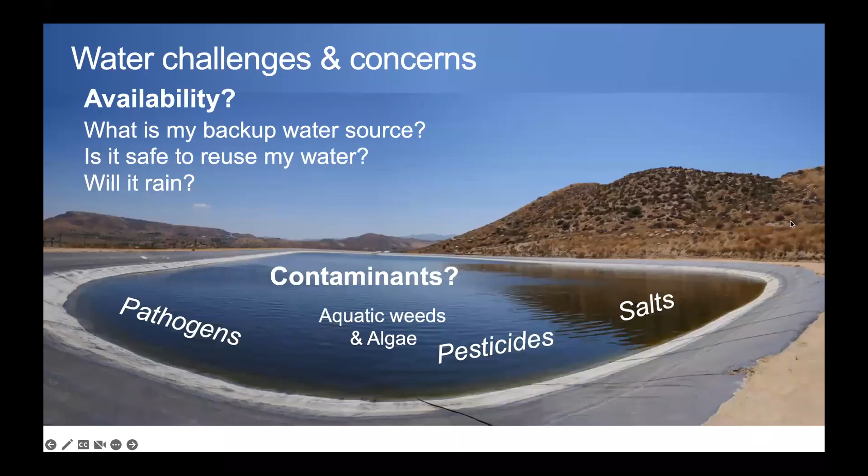And then if we think about the recycling side of things, contaminants are one of those first items that come to mind, and we're just asking, what's present? Do I have plant pathogens that I need to be worried about? Or if it's a landscape application of water, are there human pathogens that I need to worry about that could potentially impact health of humans, kids, or domestic animals? Algae and aquatic weeds are a big contaminant in recycled water, but also in surface water receiving runoff from the landscape or production areas. Pesticides and salts are also contaminants of concern, and so we'll talk about those individually as we go along today.

So the production challenges. If I think about this from a producer side and then from an irrigation side, because I'm also the nursery extension specialist for South Carolina, I tend to think more on the production side of things than the landscape side of things. But many of the production practices that impact how contaminants move on site or how plants grow, irrigation timing, irrigation efficiency, those kind of things, cut across whether you're talking about on-farm use or landscape uses, and the cultural practices of pesticide use or fertilizer application timing and plant diseases.

So in reality, it's not just, am I applying water efficiently or am I applying fertilizer efficiently, but it's, did I do it at the right time? Or what have my practices that I didn't want to change, because it's easier to do it one way than to change something, what have I lost? Is it money in terms of shrinkage of my crop? Or is it opportunity cost, that I couldn't sell them for a premium, or that I didn't grow as many? There's just a lot of factors that sort of connect with each other that really influence it.

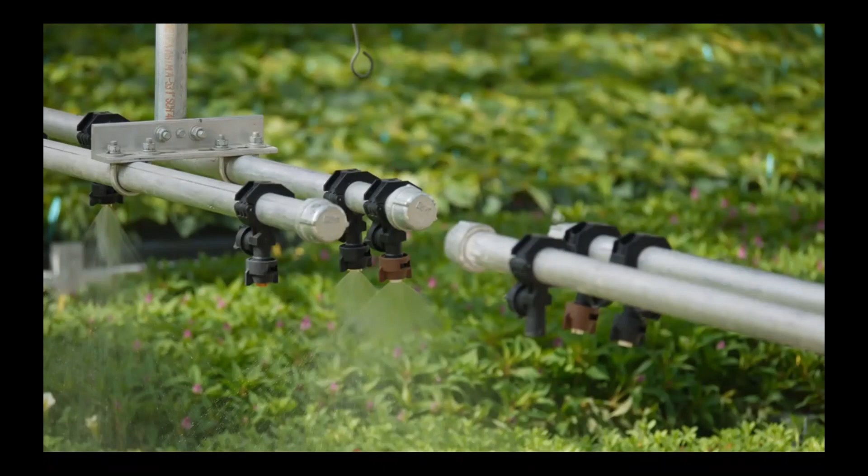And so when we think about growers, they apply water in different ways, some of which are more efficient than others. In this image, this is a boom spray system that's in a greenhouse. So the water that's applied within the greenhouse is typically captured back into a cistern and recycled. But when you get to on-farm water, typically smaller containers are irrigated overhead, and those may or may not be efficient, and then the water runs off that production area.

So operational water can be irrigation water, but it's also water that has hit its surface and come into contact with the contaminant, whether that's a sediment contaminant or pesticides or pathogens or anything else that might be undesirable. Now, when Sheetal and I were talking about stormwater and how to classify what we could capture and not capture, some of this gets down to classifications, the non-contaminated stormwater.

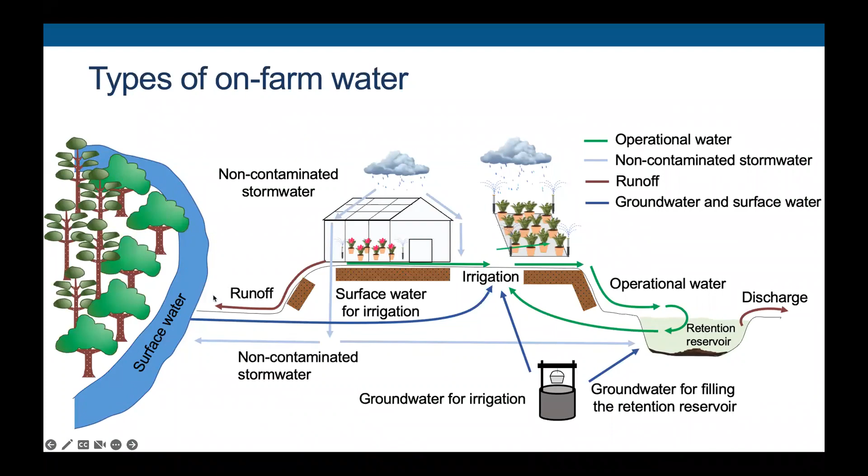I'm going to use some of these terms, but really operational water and then irrigation return flow, which is this green line where once irrigation is applied, whether it's to a landscape or to a production area, that water, if it can go into a retention reservoir, that's where we have the highest opportunity to recycle water, but also potentially recycle some of the nutrients within that water to better support plant growth, while also minimizing potential impacts to surface waters, because eutrophication and algal blooms are not something we want.

And we're seeing those more and more often as water becomes more limited and we're not recycling water as much in some of our lakes and our reservoirs. We're seeing that nutrients are accumulating. And what happens when you have nutrients accumulate in some of these areas is the process of eutrophication, which is just frankly nutrient enrichment, where you have more nutrients added than the system is used to.

And what typically happens then is you have algal blooms or excessive growth of aquatic plants and algae that can then, when they die, oxygen is consumed from the water column as they're broken down, and you can have fish kills, or you can have the worst case scenario, harmful algal blooms.

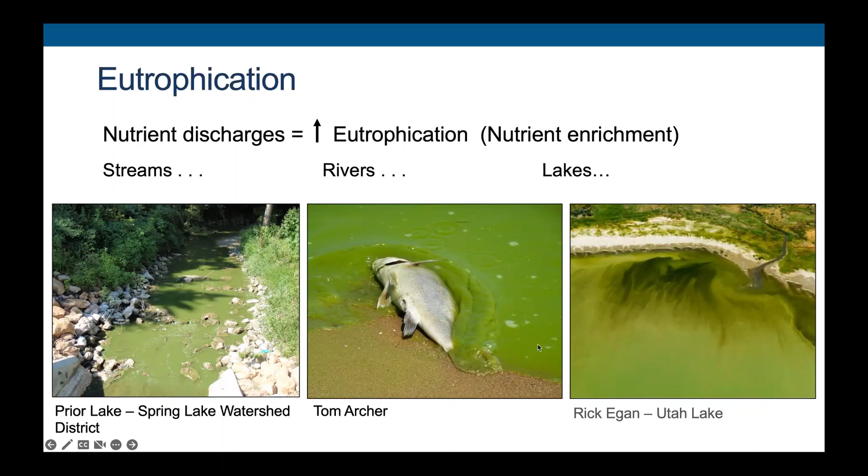And so this is where runoff control and capture of stormwater and detention of that stormwater before it leaves a particular area so that sediments or other things have the opportunity to settle out, that is what is ideal. And then also, it's not only just are you managing the runoff, but then you have water available for recycling when and if it's possible.

And that's where some of the intricacies of what you're allowed to do, I'm not sure of. So I'm just going to tell you, if you are allowed to do it and you can do it and you can get the right permits and things like that, this is how I would sort of go about it. But so if we think about availability of water for recycling, one of the first things I think about is how often is my reservoir going to get refilled by means other than just landscape runoff.

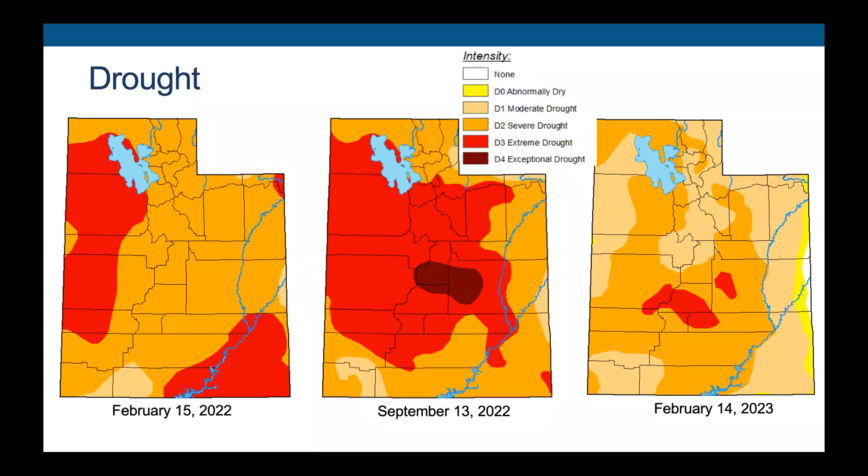So looking at y'all's drought map over the last year or so, you've had some pretty significant changes from extreme drought to exceptional drought, then back to moderate drought, and maybe even some just abnormally dry. And so this gets to how can you actually think about managing these reservoirs or your landscapes, frankly, when you don't know what the weather's going to be and you don't know when it's going to rain. Now, frankly, I think y'all might have had a bit of relief with the snowstorms and the rain that hit the rest of the West Coast. But in so saying, that's just a temporal thing.

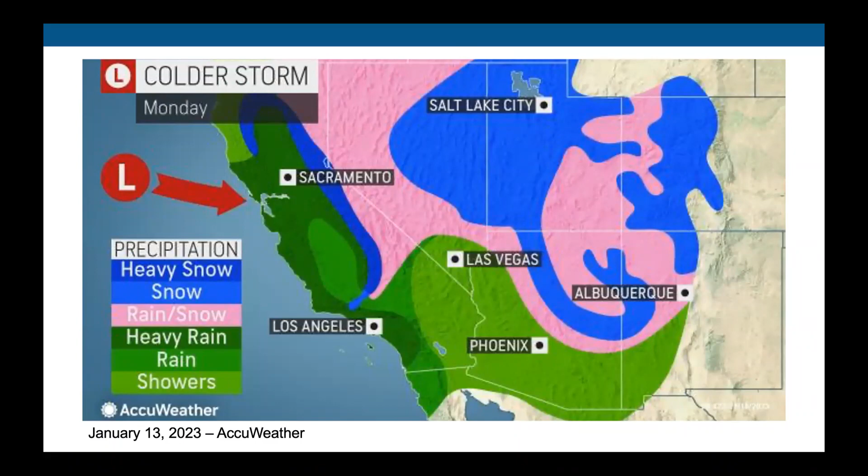So how do you capitalize on the opportunities when you have them? And so that's when thinking about the infrastructure becomes really critical, because if you have the infrastructure in place to capture water, it is much easier to then capitalize on those instances when you do have rain, so that you can ensure that you're capturing as much as you're allowed to. But when you do capture that, and especially if it's running off a land surface or a production area, there's going to be sediment carried in that water.

So if you have sediment added to water and you had a pesticide that was applied, chances are the pesticide associates with that sediment. And then it has the opportunity to move and be carried, and so it could move off farm, which would not be ideal. Ideally, these retention reservoirs are designed to capture and detain those contaminants. And then you have some sort of retention time; the longer the water stays in there without being cycled or applied somewhere else, the better the opportunity for the contaminant to degrade.

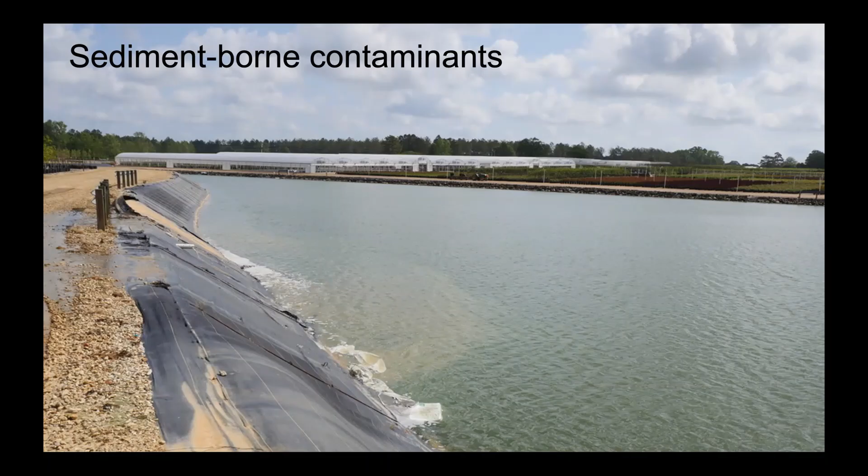But you can also have pesticides flowing in the water, and there are also contaminants of emerging concern. If we think about landscape applications, or if you all have access to municipal reclaimed water, there are some contaminants of emerging concern we can talk about if you're interested, but think about pharmaceuticals and personal care products, industrial or household chemicals, nanomaterials, and other things like that. There's just a lot of potential contaminants that we are not as sure about how to manage, and we don't know the potential impacts they have on the landscape.

So retention reservoirs, again, just give you one more opportunity to detain those and stop them from moving further within the landscape. And then the harmful algal blooms. This is one of the ones that I think we're going to continue to see growing in your awareness, but also in, what's the word I'm looking for?

How often they occur: they're going to occur more frequently, so they're going to be brought to our notice more often. Frankly, we just had one, and it's very unusual, in February at our botanical garden, where we found a harmful algal bloom. This is just something where nutrients aren't limiting, algal species start to grow, and then you have a cyanobacteria that actually starts to grow, and a toxin can be released. It's not always released, but it can be.

So we want to prevent algal blooms so that we don't have the potential for the toxin to be released, because it can impact humans, domestic animals, livestock, and wildlife who depend on those water stores for their survival. So it becomes pretty critical to pay attention and work to not have those issues, or to manage these as well. So after all the doom and gloom of the contaminants, one of the good things about reservoirs is that it sort of helps provide water security.

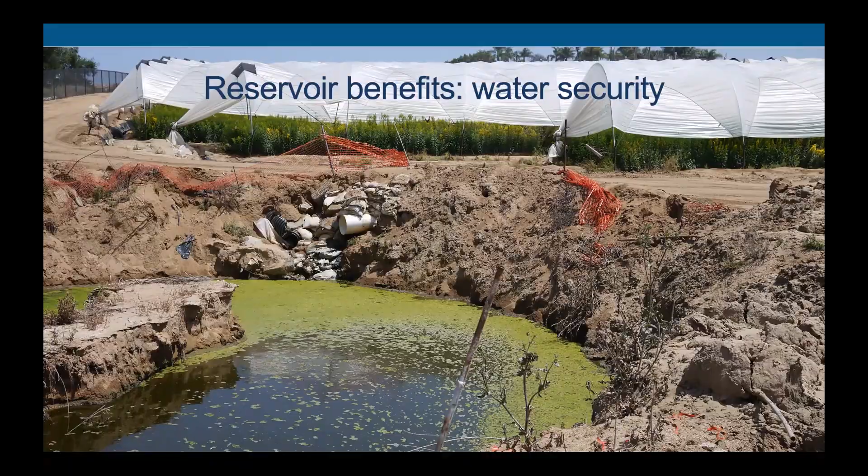This is actually a sediment forebay before a reservoir, and they cleaned out some of it, but you can see the massive sediment in the center of this forebay that they've already removed, and they still have to come back and remove more. Forebays help us trap sediment, and that's where you can lose capacity for storage, but then you can clean it out. So if we have water security because you're storing water, we're also trapping contaminants. If we can trap the contaminants or the sediment before it gets into a reservoir, we're better off, because then you have a smaller surface area that you actually have to manage.

Because management is one of those critical pieces. If you don't plan for management or maintaining the pool depth within your reservoir, and you allow sediment to just accumulate, you're going to lose some of your capacity for storage. And then all of your best laid plans may not allow you to capture what you need for storm mitigation purposes or for water security purposes.

And then again, contaminant trapping: we can trap agrochemicals, fertilizers, and pesticides, so we can retain those nutrients. Ideally, you want to recycle that water and reuse those nutrients so that you're not applying as much fertilizer. But within the landscape, think about this as a stormwater detention basin or a stormwater pond, where you're using that pond as a sink to help manage those contaminants before they get into surface waters or larger, more recreationally focused lakes where humans could be impacted.

And then again, plant pathogens. For some of the plant pathogens of most concern to growers, like Phytophthora and Pythium, the propagules that travel in water have a finite lifespan, usually less than 48 hours. So if you can have a retention time longer than that before water is reused, chances are most of those propagules will be dead and no longer able to infect plants. So even before any treatment, that water is less likely to carry a propagule that can infest or infect the plant.

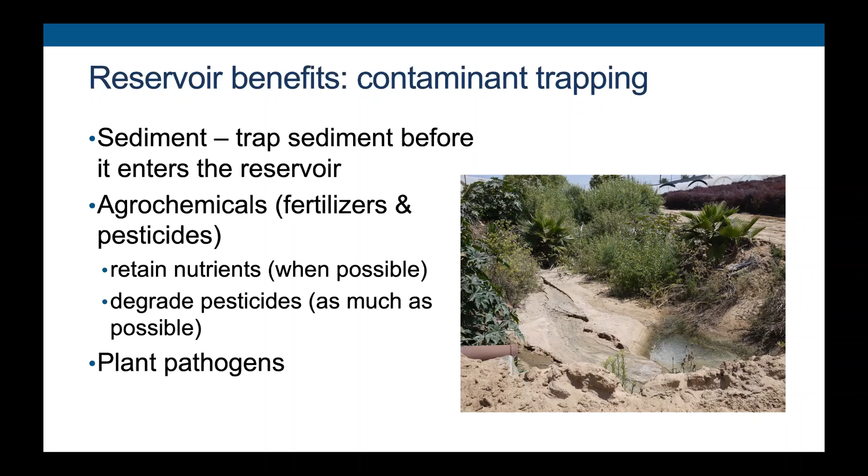So when we think about reservoir design, there are three things we really want to think about. On this slide you'll see the cutout of this land grant press article; if you're interested in design and other considerations, it takes a pretty deep dive, and the web link to download it for free is there. First, you want to figure out how much water is going to enter the reservoir over a given period and how much will leave it, because that gives you your cycle time, how fast water will cycle within it.

Point two is how long will the water stay in the pond before exiting for reuse? The larger the pond you can feasibly build within a budget, the more time for treatment you will have, or the longer the hydraulic retention time, the HRT. A longer HRT means greater storage capacity, which also leads to greater water security, because you'll have a longer period where you're not overusing your water, and you'll likely still have water running back into it. So you may have a longer time to cycle water in drought scenarios where other sources aren't coming to help fill it.

And then depth to groundwater. That may not be as much of a concern here; it probably depends on where you are geographically. In some of our coastal areas, depth to groundwater can be less than 6 feet, or less than 3 feet, so reservoirs may or may not actually be a good management option in that case.

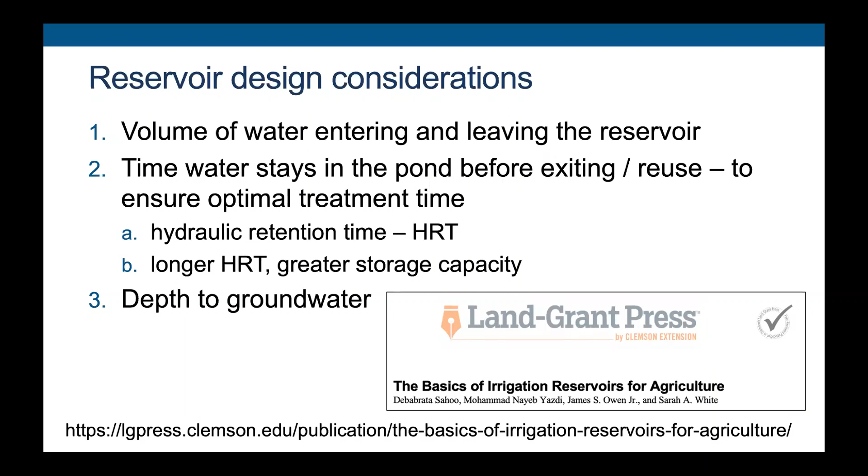And realistically, this is what you want. Something like this is what you want to see. Water comes in from the production areas on the left side and flows into this area where it's just allowed to detain and slow and sit for a while. And what's interesting about this farm, this is Altman Specialty Plants down in Lake Mathews, California, is they designed it so they could drive a track hoe or a backhoe into this and scoop it out with a bucket and clean it out.

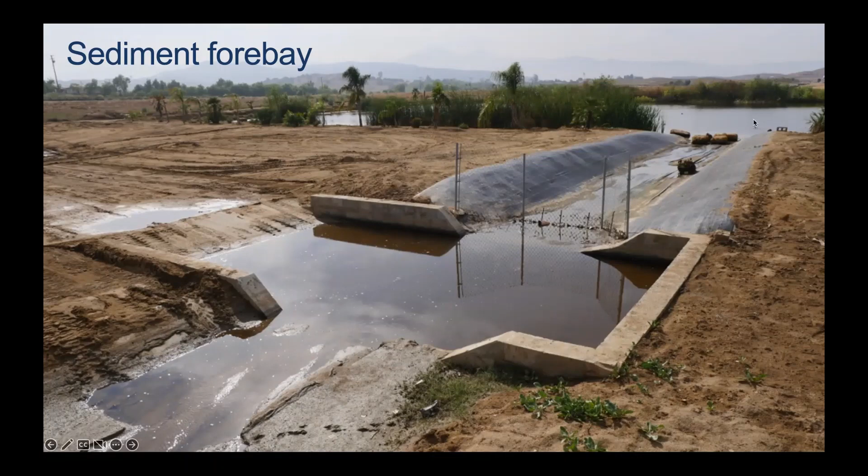So they designed it with good management practices in mind, or simple, so that it's easy to maintain. One guy can go in there, pull out all the sediment that's accumulated, and then move it out and let it dewater, and then they can use it to fix roads or whatever else they may want to. But then they know that that sediment that's accumulating here is not going into their next pond to impact the storage capacity within that pond.

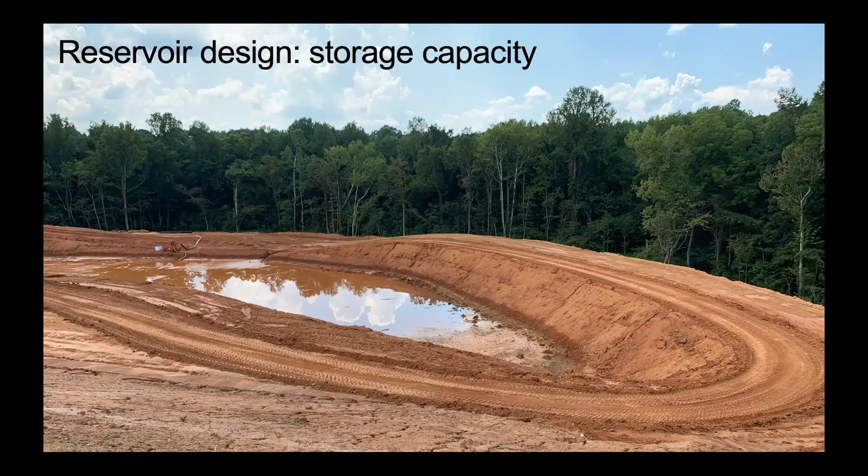So getting to storage capacity, when we're designing new reservoirs, it's really thinking about how big do you want it based on your production desires, or how many acres of production of your watershed are going to drain into a particular area. And then there's also your storm events. So previously, reservoirs were typically designed to detain 2-year events.

But looking at the frequency of some of these flashier storm events, and when I say flashier, they're greater intensity over shorter duration. So, an inch of rain in an hour instead of an inch of rain over a day. How water moves on site is going to differ dramatically just based on that. But what we're hoping is that whenever possible, especially if growers are installing new ponds, new irrigation reservoirs to manage water, you're planning for a 2-year, 10-year, ideally 100-year storm to capture that water if you're allowed to do it.

Because then that really gets to the water security and increasing or making longer your hydraulic retention time, so you have longer for contaminants to cycle within the pond and be degraded before they're ever moved either into your irrigation system or released off site. So again, that land grant press article really dives deep into this and gives you some of the thought and the perspective behind this. And this is based off of some of the NRCS recommendations.

But this is our best information based on some of the predictions we're making for water availability, and also the desire of many of our growers to be very good stewards of the resources they have. So if they can capture water and then recycle it for a longer duration, then we're competing less for some of those potable water sources that cities or industrial users may need.

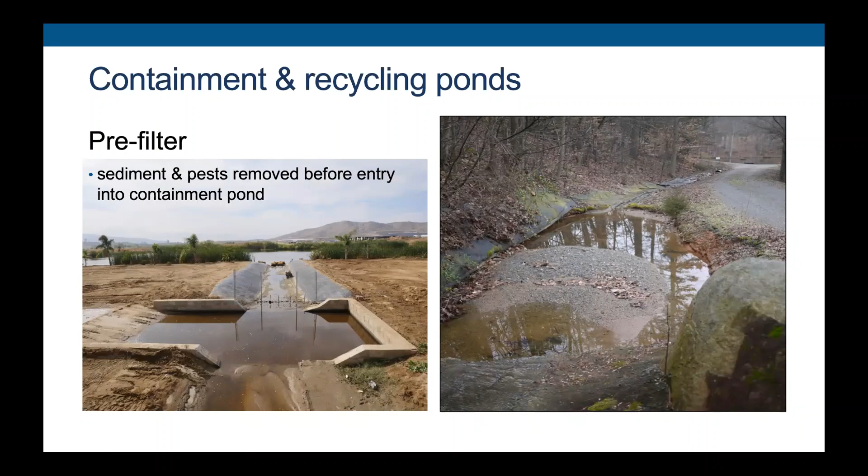This image on the left is actually, as water flows down a hill, they just built little check dams so that the grower could allow sediment to accumulate and fall in behind these check dams before it flows further down the hill. There's a lot of interesting things that can be done with minimal expense that can make big impacts on limiting how sediment can move on site. And these same types of things can be done within the landscape and be landscaped features that are nice looking, but with a function and a purpose that we can then educate the public about.

Okay, and so when we think about a reservoir and we think about wanting to reuse that water, pumping is one of those things that then becomes a critical issue. So many growers don't know that there is actually a sweet spot where you want to let a pump intake be located within a pond, and they'll just sort of fix it at the bottom of the pond. If you were thinking about it, you're like, well, if I want to be really secure, I'm going to put my pump intake to the bottom so I know I'm always in that wet pool.

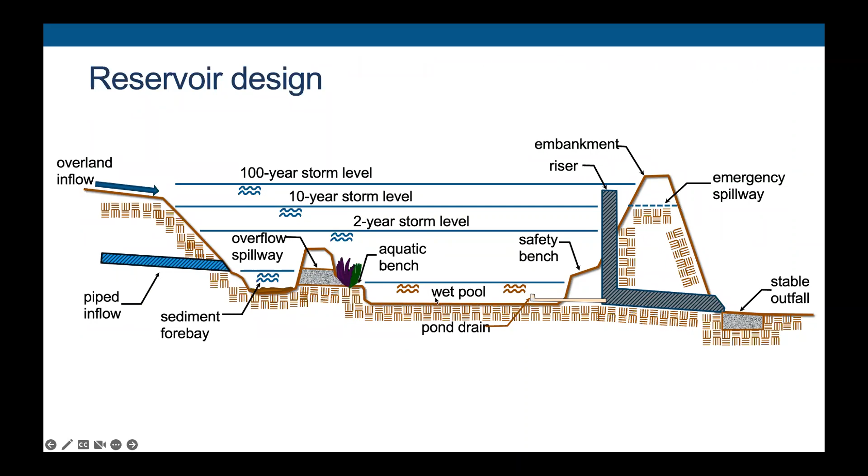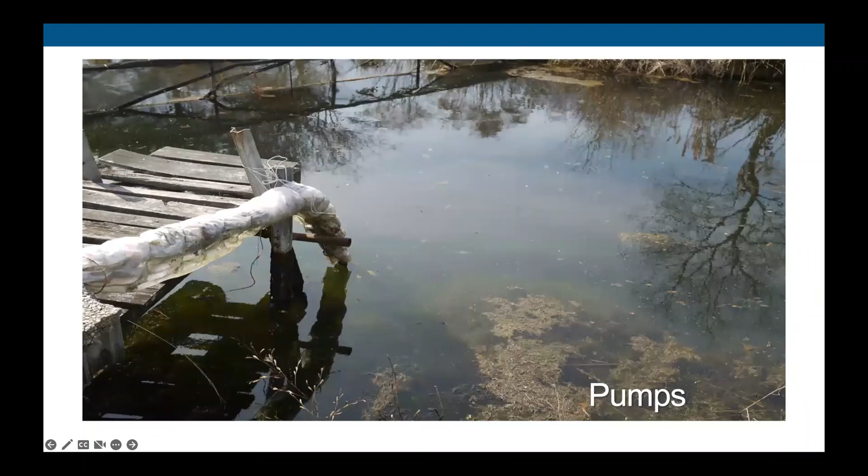Ideally, that's not necessarily where you want your pump intake to be. And that really gets down to just the internal processes within the pond. There's a lot of sediment that settles to the bottom, and then you have a lot of aquatic life at the top. So ideally, you have a floating pump intake that you have extended a set distance. Recommendations right now are about 3 feet, maybe a little bit more below the surface, but also off the bottom. You try to get it almost into the middle of the water column.

And there's a lot of different strategies for this. There's not a right way or a wrong way to do it, but you don't want it at the bottom and you don't want your pump intake at the top. And realistically, this is why. It's because of disease contaminants within water. So if we're talking about the plant pathogens, Phytophthora and Pythium, they are actually negatively geotropic, which means they like to move to the top of the water column.

So if you put your pump intake well below the top of the water column and well below that biologically active layer where all your algae will also accumulate, then you're not going to have as much issue or pressure from those types of contaminants there. If you have it 36 inches off the bottom, you're also probably going to have less issues with sediment fouling and sediment being taken up within the pump.

And then we also have to think about your pump intake location. Ideally, you put your intake as far from where the water enters the pond as possible. That's because, again, you're giving yourself retention time, the opportunity for water to be treated just by natural processes within the reservoir before it's ever reused. But then if you're using filters, don't put your backwash filter outflow right next to your pump intake, because your pumps, your filter systems and the backwash are going to be working a lot harder because they're going to have to move more contaminants.

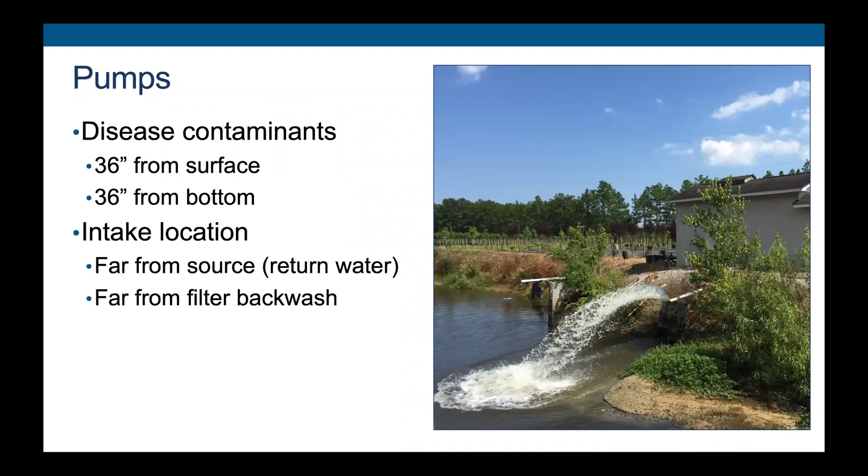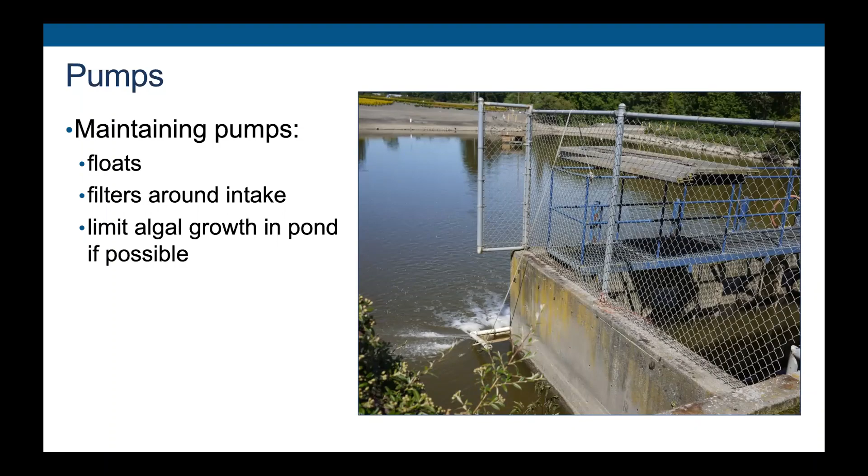Also, for the pumps and maintaining the pumps, have them on floats. Ideally, you have a filter around the intake. The image to the right here is where they actually have an aeration system that blows and keeps all of the stuff that may be floating on the surface away from the pump intake, so that it doesn't actually come into the pump intake, so that there's less work that the filters have to do. And then also limit algal growth in the pond as much as possible. And I'll talk about that in a little bit as well.

So if we're thinking about water management and contaminant management, grading your site is really important. You really don't want to see standing water. You really don't want to see algae growing in your roadways because the water has been standing on site so long. I was shocked at this one. This is actually a Florida grower, so you will probably never see this where you're at. They had duckweed growing in their production areas. There was so much standing water, which is just not ideal. Although they are adapted to it, they actually have these nice little concrete blocks that they have put their plants on, so they're not sitting in the water.

Because over irrigation is one of those things that if you can manage how much you're applying, you're going to be leaching less nutrients out of your pots, or frankly out of your landscape. So if you can manage your irrigation better, then you're going to have less contaminants within your runoff to manage, which then means you have less that you have to treat. And that's the ideal feedback loop that we have. Even if a production area is well managed, when there's just consistent water applied, there may be issues with this black sludgy looking organism, which is actually called nostoc, N-O-S-T-O-C.

And it's really hard to control. It's not necessarily that it's something that's dangerous. It's just incredibly slippery. So if you have people walking over it, it's slippery and they could fall, and worker safety is an issue, but if it's in an area like a garden center, I've seen it in garden centers sometimes, that can also be an issue of customer safety.

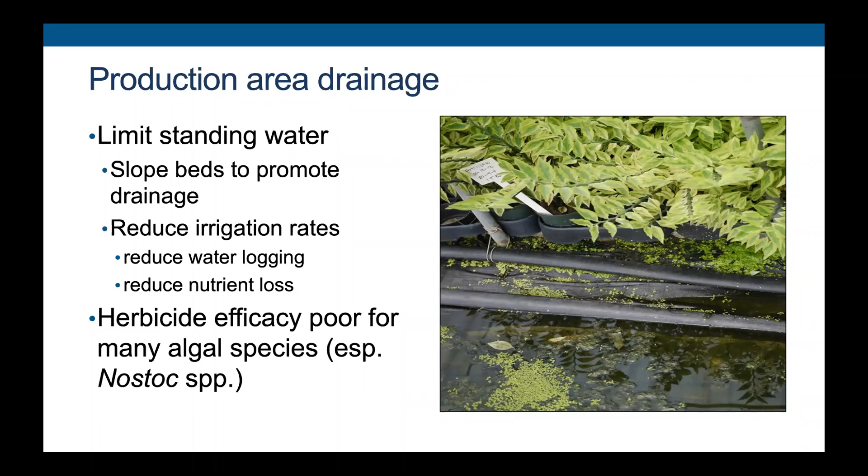And it occurs both on land and actually occurs in water as well. The large patches can appear suddenly on moist paths, roads, roofs, and poorly drained ground. And it can be a little or a lot. So if we can limit standing water by sloping the beds and reducing irrigation rates, that goes a long way to solving many issues, not the least of which is how much fertilizer is actually being wasted or not staying where you want it.

And when the fertilizer then moves from your production areas or from your landscape into water, this is when you begin to have extreme issues with algae and aquatic weeds within the landscape. Riparian buffers, even around retention reservoirs that are man-made, are a practice that should be done because it's going to help you maintain water quality within your reservoir much more than anything else. It's one of those simpler solutions, at least at the front end.

Yeah, you may lose a little bit of production area, but if you're managing your water quality and you don't have to manage algae as much, it's worth doing. But there's also ways to think about this: can you build two smaller ponds instead of one larger pond? The first pond that receives water tends to be the dirty pond, and the second pond receives the outflow from that first pond and tends to be a cleaner pond. So if you can make connected ponds, that also helps with retention time and water quality.

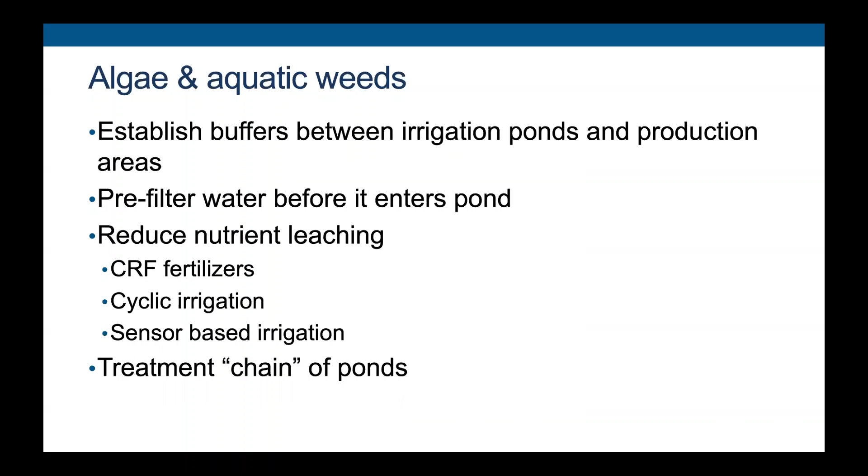So once you get your reservoir and you're pre-filtering and all of that, are there things that can be done that don't involve chemical treatment? And the answer is yes, there are ways that we can treat water for reuse that are pretty low tech, that allow us to clean the water so that it's safe for reuse.

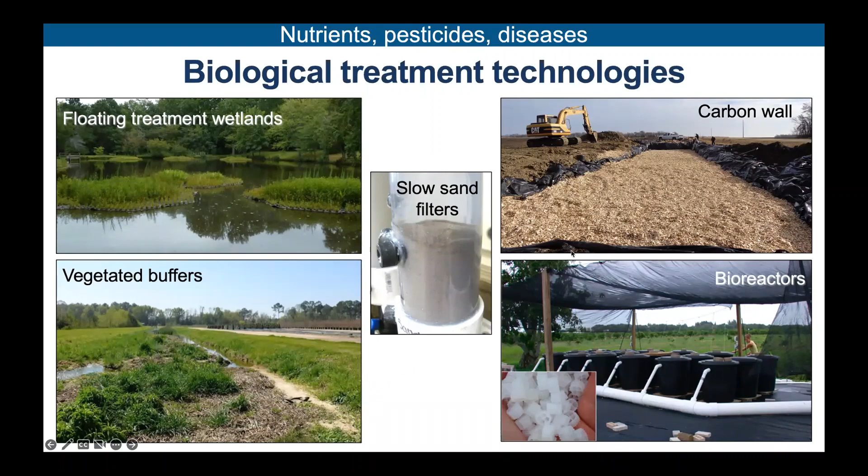Floating wetlands are a newer technology that works. We've seen most of the work done in stormwater ponds and stormwater applications. I'll talk a little bit about that for production areas. Vegetated buffers are probably the most common practice that we have seen, and it's easy. It's sort of that bulletproof, it's been around for a long time, and there's a reason it's been around for a long time and will continue to be used. Slow sand filters are another great option, as well as sort of this carbon wall and the bioreactors.

So filter strips and vegetated waterways are ideal because, frankly, you're just intercepting any water that is coming off of a production area, and you're filtering it, and you're giving the plants the opportunity to take up that water and to have sediment settle in.

One of the nurseries in California had concrete lined ditches, and they actually grew a second crop of canna within these ditches. So they were cleaning their water, getting the sediment out, managing their pesticides while growing a crop that was then imminently saleable. And they actually had trouble keeping plants in the ditches because the plants grew so well that the marketers wanted to always sell them. So there are opportunities to use some of these treatment areas as secondary production areas.

Again, the filter strip idea, where you're just having a place for sediment to settle, but also where all of the vegetation around that is also providing microbial habitat for microbial communities. And then you're getting much of your water treatment that way. Then there are also vegetated waterways.

Depending upon how much water is coming off farm, or if you're not even recycling it, whether it's just treating it before it's leaving your site, vegetated waterways are one of these things that it's just sort of a very shallow marsh where you just have consistent water. It can also sometimes be more ephemeral if it's not all the time, as long as it's periodic enough that you're irrigating like once every 3 days, something like that, especially if it's really hot. There's different plants based on how consistent water will be, but they tend to work very well.

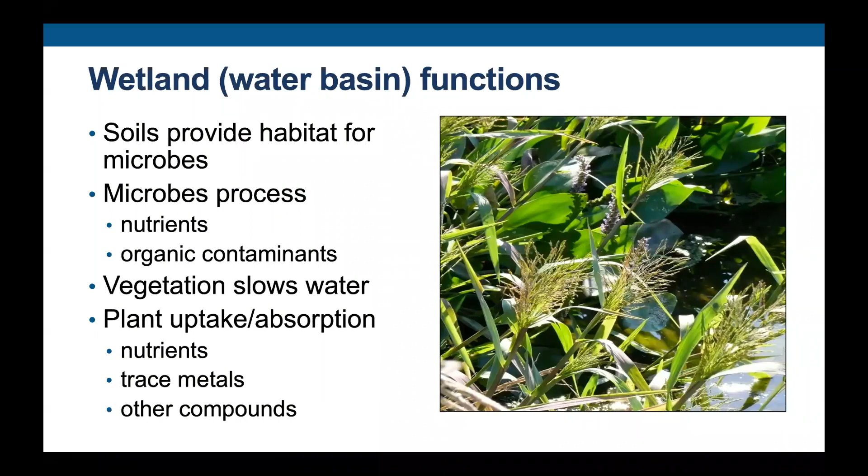And so your soils provide habitat for microbial communities. The microbes, think of denitrifying bacteria, help transform nitrate and help it volatilize into nitrogen gas, so it's released back into the atmosphere. They can also break down pesticides, the organic contaminants. The vegetation slows the water so that your sediment has a chance to settle out. And then the plants can also absorb some of the nutrients, metals, and some of the other compounds from the water to help clean the water.

Floating wetlands are a newer technology where, if you have a retention reservoir and you're having issues with water quality or algal blooms and some undesirable plants, floating wetlands are one of these options that may actually work to help you manage water quality within a reservoir without taking land out of production for that purpose.

So if we're thinking stormwater applications, that actually may be ideal, unless it's Canada geese, and then that's a whole different question: can we get rid of them?

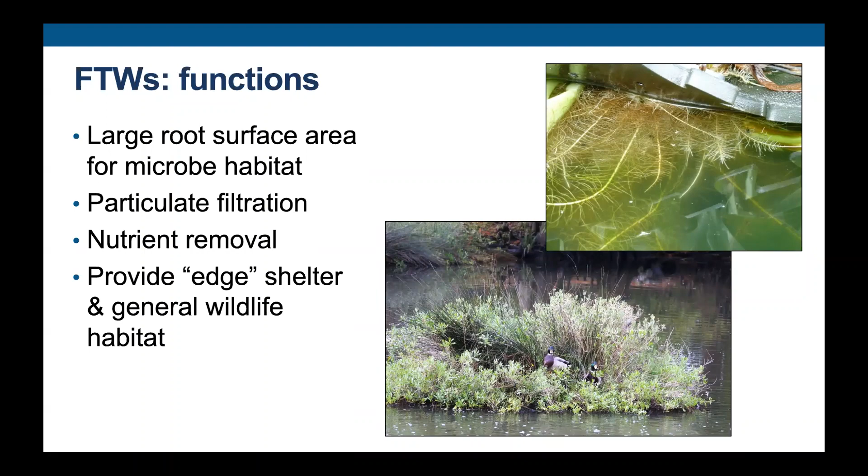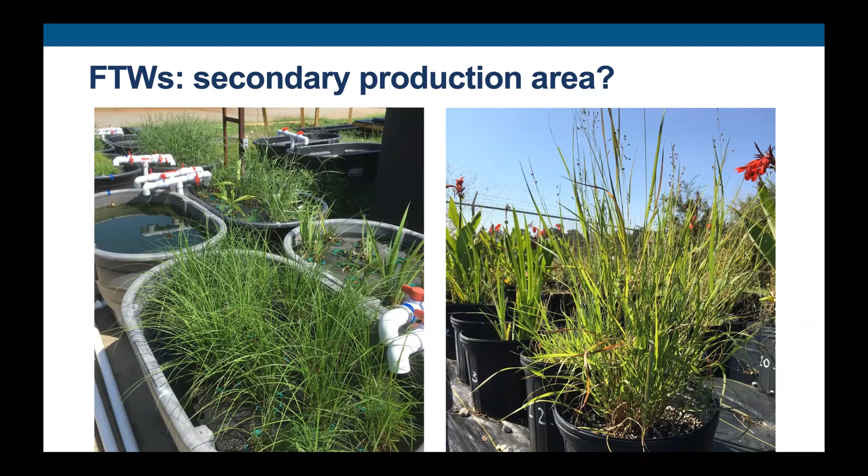But if we're thinking in terms of nurseries, can we use floating wetlands as secondary production areas, or to produce plants that are pretty bulletproof? We can grow them in the wetlands for 8 weeks or 3 months, clean our water, pull them out, cut the roots off, stick them in a pot, grow them for 8 weeks, and sell them. One of my PhD students did some of that work, and it actually does look feasible, with a return on investment where you're breaking even after 2 years, and then you'll start making money on the floating wetland investment.

But ideally, when we think about recycling water and managing water on farm, any options that you choose for recycling water are really based on the economics or the capacity to invest. So how much is it going to cost? How effective do you need it to be? And then we can really customize any treatment technology to what your goals are.

So if we have a production area where we've dialed in the irrigation system, we can figure out how to put in a carbon wall or a bioreactor, which is basically you dig a big hole, put a liner in it, stick some wood chips in it, and then let water start to flow through it. Depending upon your flow and your retention time, you can get rid of some pesticides. If you want to look up Dr. Tom Fernandez's work and Damon Abdi, they've shown some high efficacy with fast flow rates.

Or if you're wanting to get rid of nitrogen with less effort, you let the water stay in those bioreactors for a longer period of time, and nitrogen can be removed. Or you can have water flow through the bioreactor and then through a vegetated channel to clean it further, or a sediment catch basin, or a constructed wetland, or a floating wetland. And then you have your treatment train of ponds, where you have a dirty pond using a floating wetland to clean the water, but also potentially as a secondary production area, to the next pond, to your clean pond, where you have a lot of other treatment options.

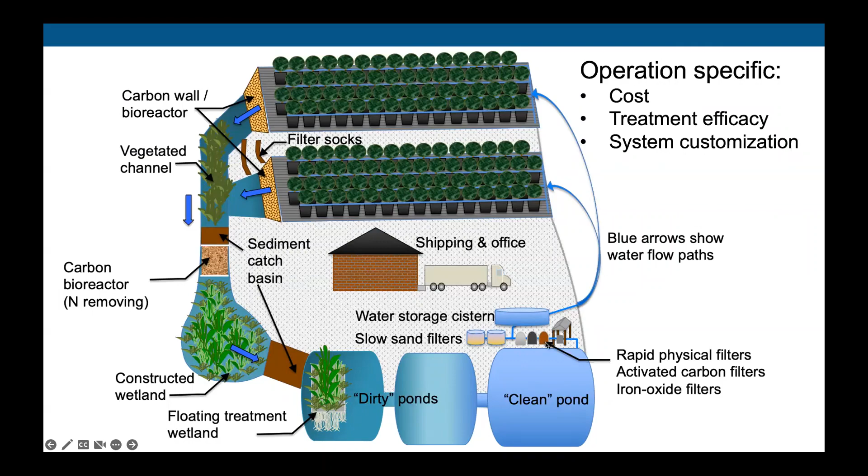In thinking about this, let's do a case study to show you what's feasible and what has been done. This was done in California. Altman Specialty Plants had 157 acres in 2016. 53% of it was outdoor, and about 40 to 50% is under shade or in the greenhouse. They were getting water from the Western Municipal Water District and the Metropolitan Water District of Southern California.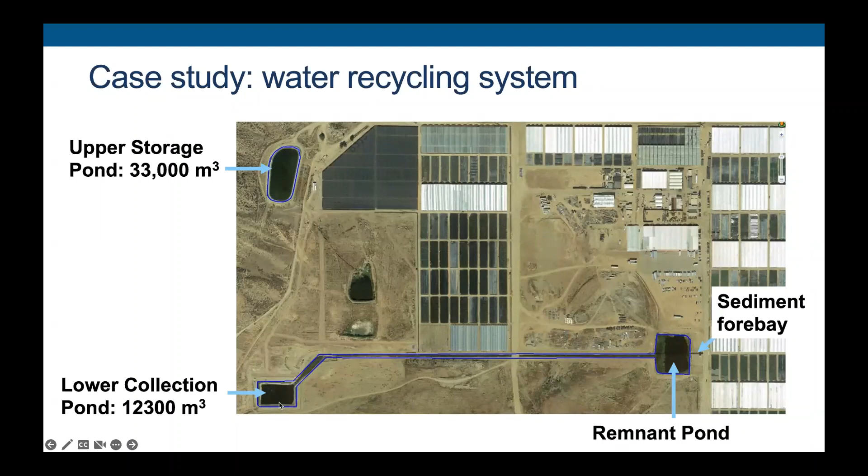Water is then pumped to an upper storage pond. So they designed a system. This used to be their old pond. They installed this pond, and then they realized they wanted even further capacity to capture and reuse, so they didn't lose any more water, so they installed another pond at the top.

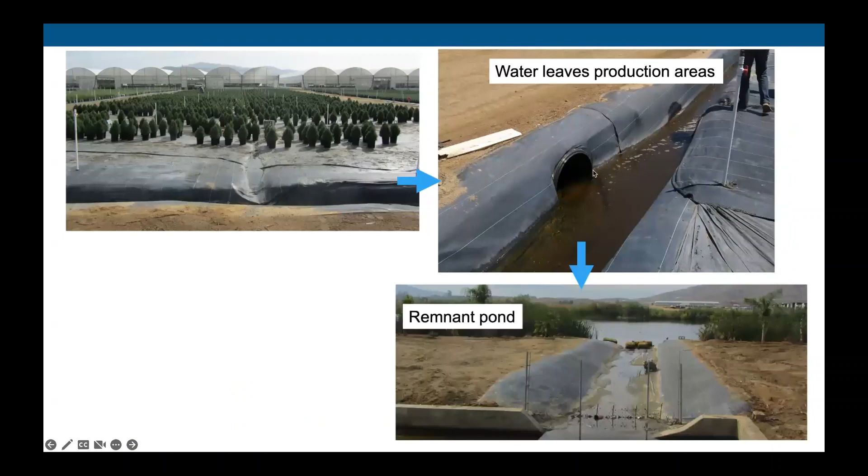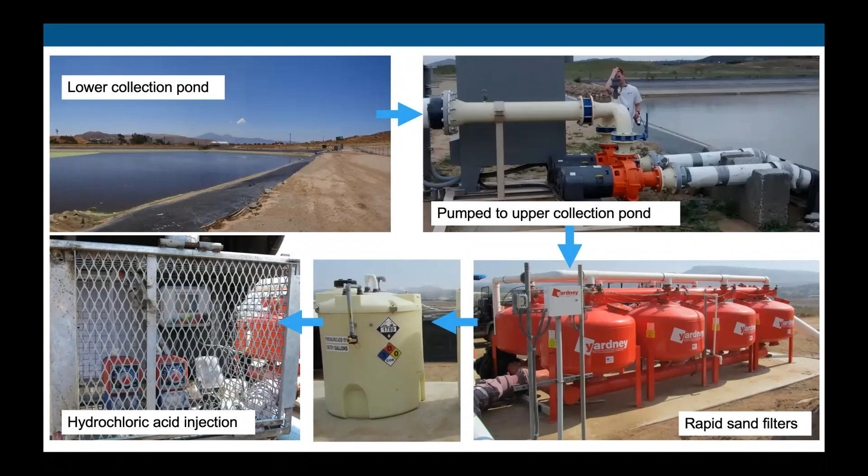And so what this kind of looks like is water can flow off the production areas and then flow through into that remnant pond where that vegetative buffer is, and then down that water channel to the lower collection pond. Once it's in the lower collection pond, it's pumped to the upper collection pond, but it goes through a series of rapid sand filters, and they actually acid inject to sort of manage pH before it goes into the upper pond, from which it's pumped, and they inject chlorine dioxide to sanitize the water so there's no plant pathogen issues, and then it's applied as irrigation.

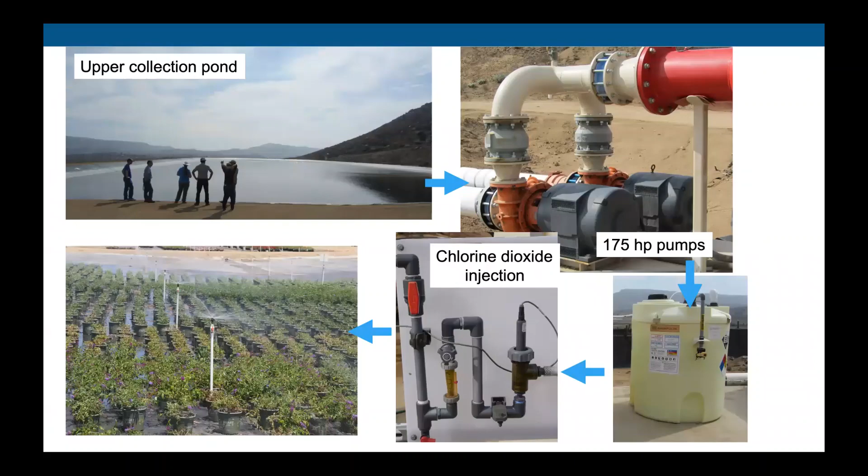And so when doing the cost benefit analysis of this system, they figured out how much it actually would have cost with no rebates or no grants, because they got rebates from the Water Management District and an NRCS grant to actually fund this work. And it cost them about $1 million to actually install everything from the irrigation reservoir to all of the filtration equipment that was needed. With the subsidies that they were able to get, their net cost was about $360,000. And their estimates of lifetime last from 10 to 20 years before they'll have to start replacing any of the components. So they almost had $670,000 of subsidies because the water management district wanted them to recycle more water and not just have a once through and release of water.

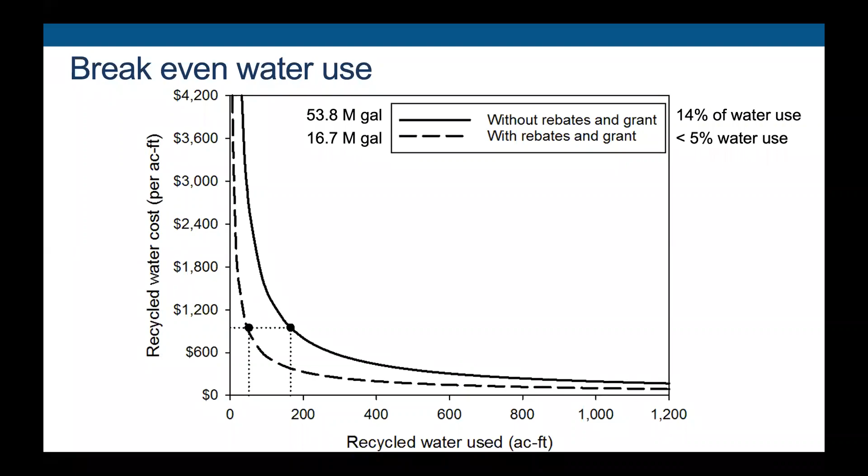So just sort of things to think about and to consider if you want to recycle water: the first thing that I would think about is water security and sizing that retention reservoir for your maximum stored water capture when allowed, so that you can extend your irrigation water. This allows you to not only have water security, but it also allows you water treatment options because your reservoir in and of itself is serving sort of as a treatment area for water. So the longer water is held within the reservoir, the better off you are.

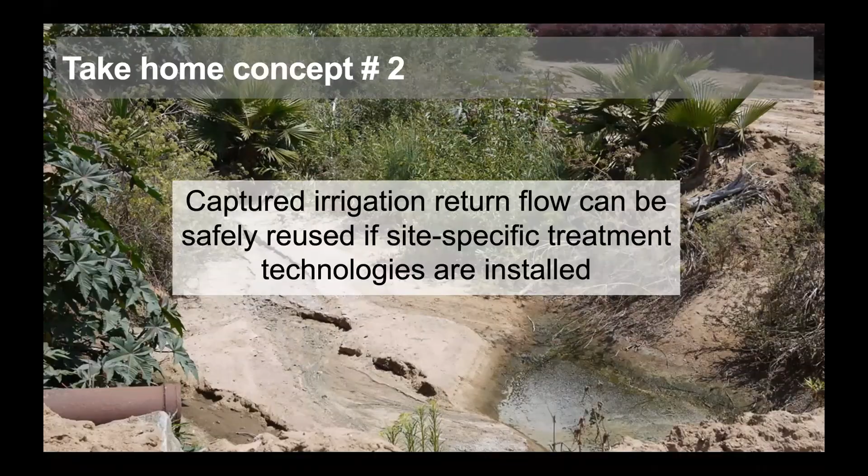Captured irrigation return flow can safely be reused if site-specific treatment technologies are installed. So once you know sort of the constituents of the irrigation return flow, whether we're talking nursery or landscape, we can sort of develop those site-specific treatment practices that actually enable effective reuse. And I harp on floating wetlands because it's one of my favorite research areas in my lab. But the biological treatment technologies are effective, but I will say they are site and contaminant specific.

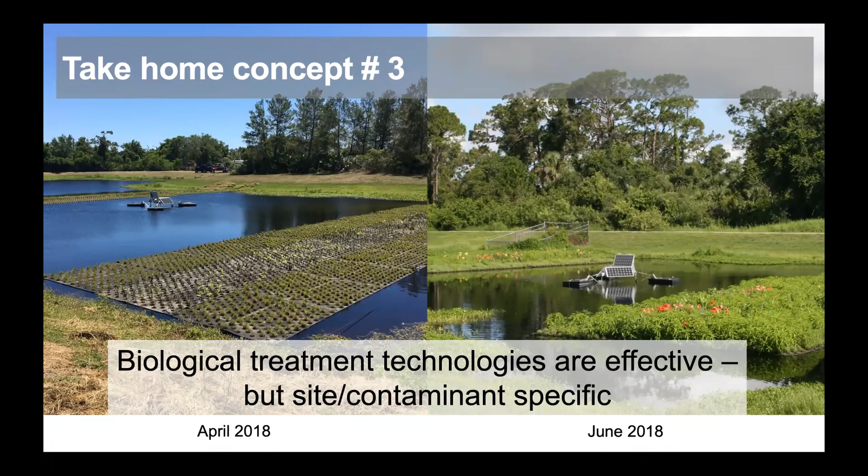So this is not something you can say, well, I think I want to do this because I want to get rid of a pesticide, let's say glyphosate. It may or may not work. So we'd have to really think about the chemistry of whatever contaminant you want to get rid of so that we can pick a practice that will actually be effective. Because the last thing we want to do is pick a practice and it not work for what you want it to work for. And then that final take-home message is recycling water can save money when your water costs enough. But it can also sort of buy you some goodwill within the community.

If they're seeing you're growing plants that they want for their landscape or for food, and that you're also being conservation and environmentally focused, and you're recycling water because you don't want to release contaminants in the water, and you're helping to treat that water before it's released. So there's a lot of intangibles in the recycling realm that we're just starting to delve into, the social impacts of recycling water. Some of those are people like them, and some of those are people may not like them. But it's all in getting our message out there and helping formulate it so that it is wider accepted.

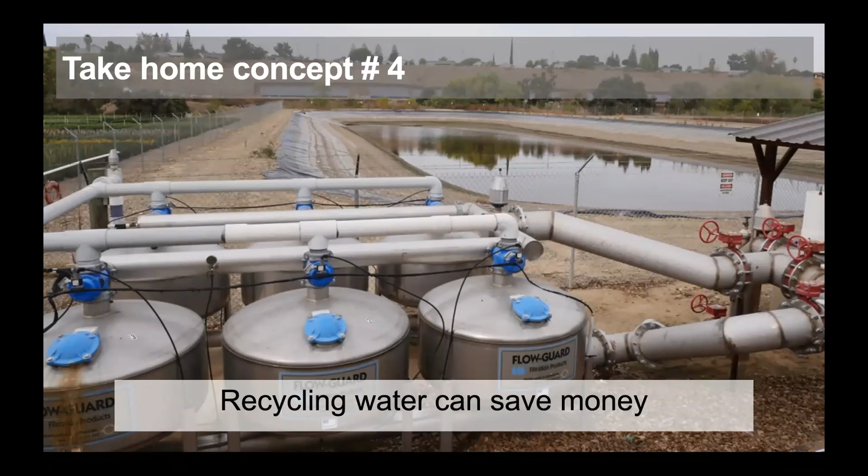And what again was concept one? Concept one was size irrigation retention reservoirs for maximum stormwater capture when allowed. So that's thinking about if you know the frequency of a 5-year storm or a 10-year storm or a 100-year storm, and you can actually size a retention reservoir to capture that projected volume, then you're over engineering your system, but you're also enabling capture of larger volumes of water that would otherwise not be captured if it was undersized.